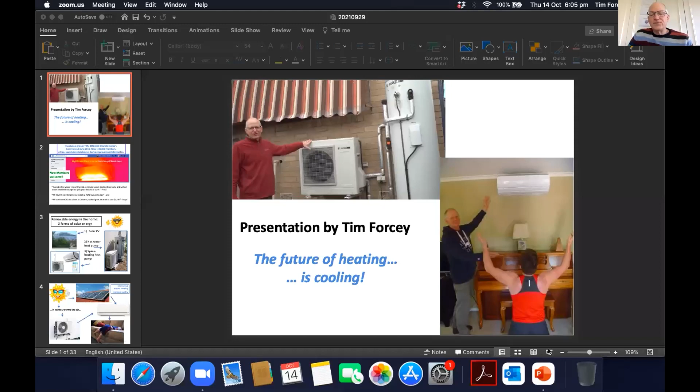The future of heating is cooling.

This is actually my second presentation today. Earlier on, I was presenting to an inquiry. On the western part of Melbourne, the gas industry is going to be installing another pipeline because they want to make sure that they can get peak winter gas to Melbourne on a cold winter day. And they think that they might have trouble doing that. So of course, they just want to keep expanding gas supply infrastructure.

My presentation there today was about how we could address that situation differently by reducing gas demand. That would make a lot more sense, because what I'll be showing you here tonight is how people can save a lot of money by not burning as much gas.

I'll be talking about the use of heat pumps, basically reverse cycle air conditioners, for heating your lounge room or for heating your water. Heat pumps suck free heat out of the air, and that's why it's so cost effective to use them for heating your living spaces and water, because free heat, well, no one's going to send you a bill for free heat. So that's why they're so cost effective.

A lot of the stuff that we'll be talking about here tonight is the stuff that we talk about every single hour of every single day over at the Facebook group My Efficient Electric Home, which is now at 35,000 members. That's the figure we had recently.

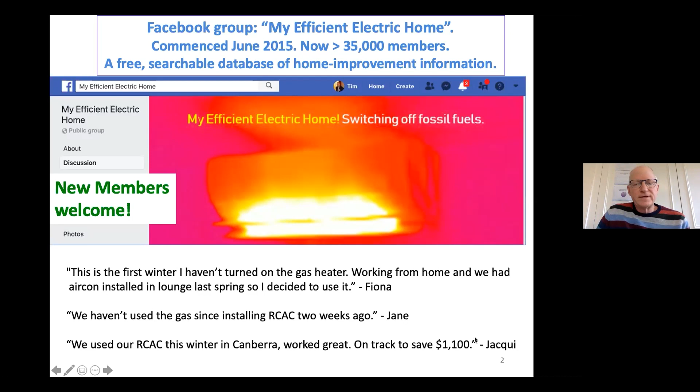So reverse cycle air conditioners are fantastic. Sure, you can use them for cooling, but you can also use them for heating in winter. And the point I made before is that using these heat pump devices, it's another way to harvest renewable energy.

So perhaps you don't have a good roof, or maybe you don't have a roof at all, and you're thinking, gee, I can't use renewable energy, I don't have a roof. Well, you don't even need a roof to use a heat pump. They're able to suck heat out of the air regardless of where you install them, outside, on a roof or on the wall, doesn't matter. So it's getting that message across that this is actually another form of tapping into renewable energy.

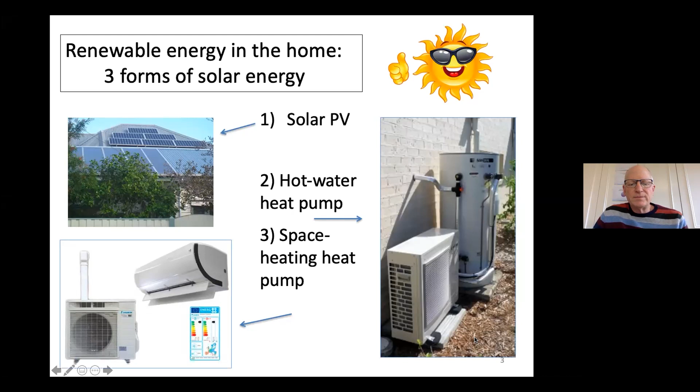And for some homes, it's the biggest way that some homes use renewable energy. With these heat pumps, you do need some electricity to drive the compressor, but if you're able to do that during sunlight hours, or even after sunlight hours if you've got a battery, running these devices with your own electricity generated on your rooftop with solar panels is an excellent combination. This way you can provide the cheapest heat and the cheapest hot water.

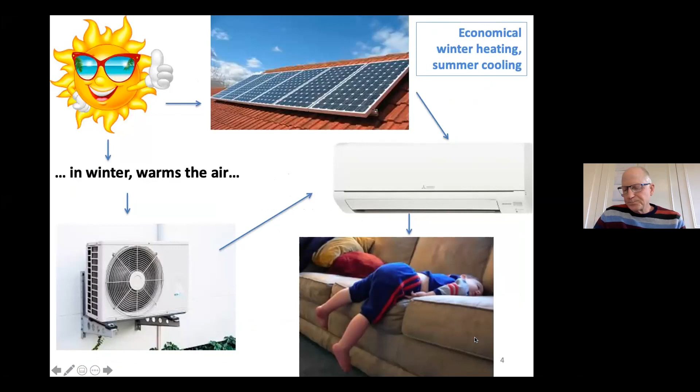Some of the work I did on this dates back a few years to research we published out of the University of Melbourne. We found just how much money people could save by heating with their reverse cycle air conditioners. Every year there are more reverse cycle air conditioners in homes across Australia, but people tend to only use them for cooling. They need to understand there is a heat button there.

So find that heat button. We're almost out of the heating season now, but we do have a big storm coming from the south. So if you've never used your reverse cycle air conditioner for heating, as this big storm comes up, go find that remote control. It might take you a few days to find it, since last summer. Find the heat button and use your air con for heating, because this can be the cheapest way to heat, far cheaper than heating with gas.

In fact, all the gas we're burning in homes these days across Australia is essentially economically wasted, because starting from a few years ago, with these heat pumps, we now have cheaper options than burning gas, and gas keeps getting more expensive all the time. So really any gas being burned in homes is an economic waste. We should stop doing that.

Sure, there can be a transition. Maybe you don't have a reverse cycle air conditioner yet, or maybe your hot water service is practically brand new and you think you shouldn't be switching it over just yet to a heat pump. So there'll be a bit of a transition, but the faster we can get off gas, the faster we can start saving money and also reducing the use of that fossil fuel.

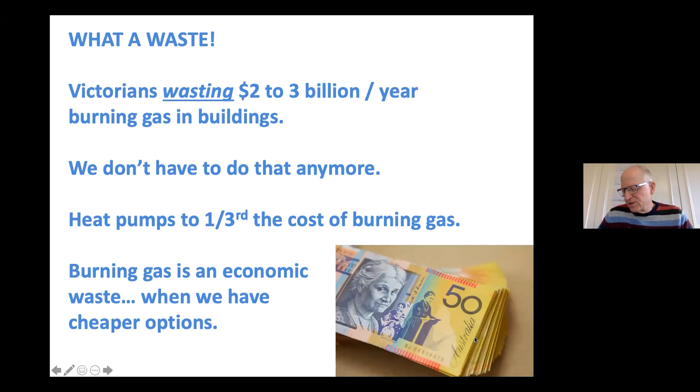We put one air conditioner at either end of the house, with the mind that we would use it for heating as well. And that's what we found we could do. So two split system reverse cycle air conditioners, one at either end of the house, is adequate to heat this house. We were able to get rid of the ducted gas heating, which was old anyway. I did some calculations and worked out that we are able to heat the house with the air cons at about a third the cost of gas heating.

This is tremendous. I mean, all the time we're talking about how the average Australian home has trouble with the budget. Well, here we can suddenly cut their gas heating bill to a third of what it used to be. So why isn't this great information, this news story, more widely publicized? So tell everybody about it. Heat with your air con, it's the cheapest way to go.

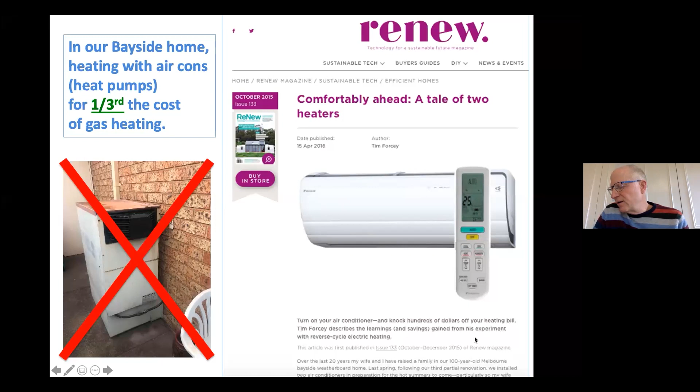But how do they really work? How do these heat pumps work? It is confusing for people, and it's one of the things that holds us back. But there's a refrigerant cycle in there, just like your refrigerator.

At one point in the cycle, in winter, the refrigerant gets to like -30 degrees and goes outside, where air is blown over the outside unit of your air con, and that warms up the refrigerant. So instead of being -30 degrees, the refrigerant's a bit warmer. The refrigerant goes through a compressor, which makes it really hot, and it comes inside to the inside unit, where another fan blows the heat off that refrigerant into your lounge room. Then the refrigerant goes back out and does it again. So in a sense, it's like a water pump.

You use a water pump to pump water uphill. These refrigerant devices are able to pump heat uphill from a place outside your house where it might be cold, but there's still heat in the air, and outside it's not -30 degrees. So there's plenty enough heat in that air to heat that cold refrigerant. Then the compressor pumps the heat uphill to 40 degrees or something inside with the inside unit, so when the air blows across the heat exchanger inside, it's enough to warm up your house.

And as I said before, that free renewable heat, where'd it come from? Really, it came from the sun. It's the sun that heats our air.

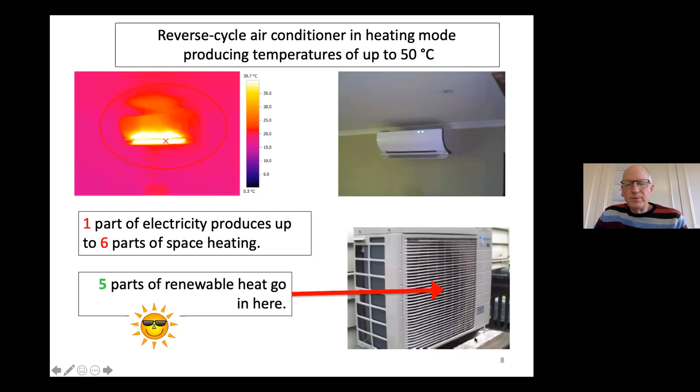Some people call this electric heating. I call them heat pumps, because here's another form of electric heating, which are these cheaper electric heaters that are basically like a toaster. What you do is put electricity through these, and 1 unit of electricity going in gives you 1 unit of heat coming out. That sounds pretty efficient - it's 100% efficient. But with heat pumps, they can be 500% efficient, because for every 1 unit of electricity you put in, you can get a great multiple of that amount of heat coming out. So you could say they're 500% efficient.

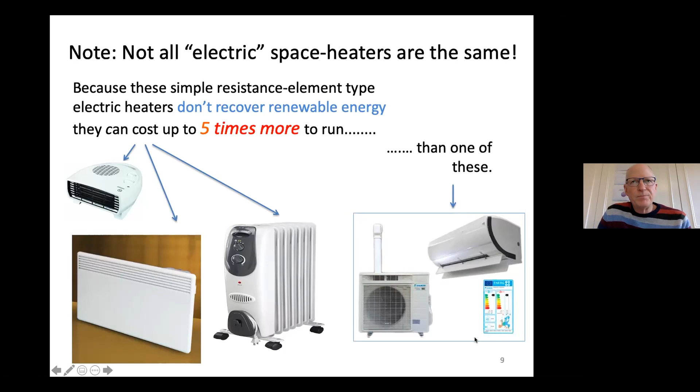Over time, Richard was able to get his house completely off of gas. And you see, one interesting thing is that the use of electricity doesn't even go up very much. So Richard would have been making other improvements across his house, probably improving insulation, reducing drafts with some draft proofing, maybe got a better refrigerator, a more efficient television. All those things add up.

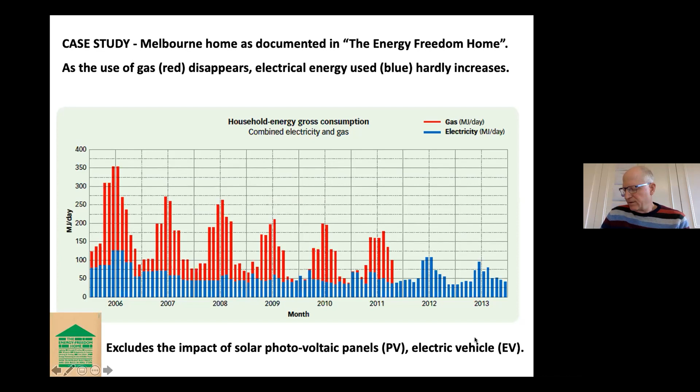So if you do all those things, you might find that you can get your house off gas, heat it, be comfortable, and your electricity use doesn't even go up that much. And this chart doesn't show the impact of Richard's solar PV system. So of course, if you can get solar PV happening on your roof, you might find you can make your net electricity use totally disappear, and your net energy bill totally disappear as well. So that's how you can get your houses off of gas.

And I described how you do that for heating, and you can also do that for your hot water. So here's a hot water heat pump - again, it's basically a reverse cycle air conditioner. It's not going to do anything for your lounge room, all it's doing is heating up the water in the tank that you see there. And again, it uses that leveraging effect where you put 1 unit of electricity into the thing, and you can get 4.5 parts of hot water coming out of it, with those suddenly magical extra 3.5 parts of heat. Where did they come from? They came out of the thin air outside your house.

And with these hot water heat pumps, you can even get renewable energy certificates, maybe as much as $1,000 off if you buy a hot water heat pump, because the Australian government recognizes this as renewable energy, and so you get some credit for that. And more recently, even for air conditioners for heating your house, the Victorian government's started to offer $1,000 rebates in some cases for people buying air conditioners that replace, say, an old dodgy gas heater or a less efficient electric heater. So that's what's possible.

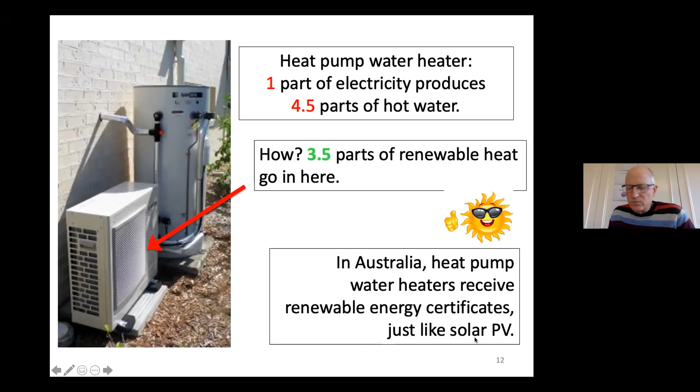That's what the members of the Facebook group are doing. I'm sure that's what a lot of the sustainable houses we'll see will not be using gas anymore. And so the word is getting around. Renew has obviously published information in this space, as has Choice Magazine. And as I said, the Victorian government's even coming on board, talking about planning for the electric home.

And this was a surprising one, AGL. You would have heard of AGL, they sell electricity, but they also sell a lot of gas. But if you dig deep into some of their web pages, you'll find they're saying that you shouldn't buy any gas, because you and the world would be better off if you didn't. So here we have even a major retailer, AGL, saying get your home off gas.

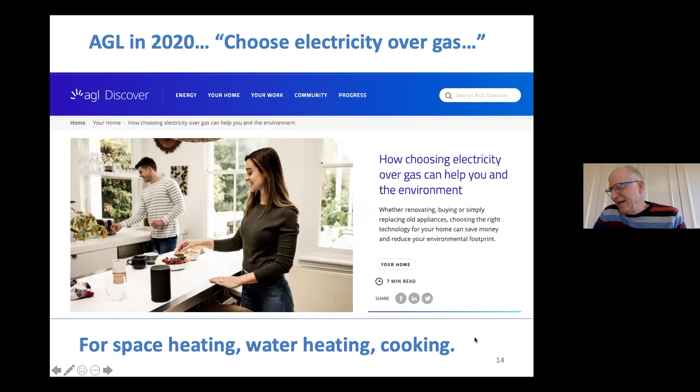And so people are doing it. We're collecting a gallery of these images of where the gas meter used to be.

At our house, we finally got around to doing the kitchen renovation. And so that was the end of the gas cooktop, and the induction cooktop went in, and we just had our gas meter taken away recently. I rang up Power Shop, said let's abolish this thing, and they organized for it to disappear. It cost me $69.13. So that can be the cost for having a gas meter taken away, because your garden will look much nicer if you plant a shrubbery there where you used to have the gas meter.

So that talks a bit about efficient heating, low cost heating. I didn't mention, in our old weatherboard house here with those two air cons, our whole heating and cooling bill is less than $200 a year.

I go into houses as a home energy advisor, and people are spending $10, $15, $20, $30 a day on gas for heating. So homes like that, in 10 days, they're spending more for heating than what our house would use all year. And it's just an old weatherboard.

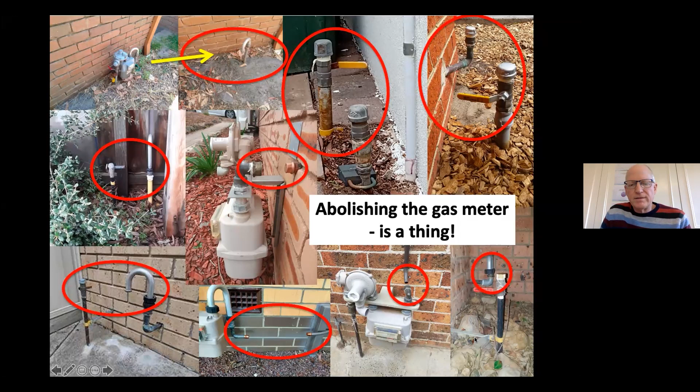Sure, some bits of it have been improved, but it really is key having those efficient air conditioners for heating and cooling. But it is really important to talk about the thermal envelope of the home, because there's no point putting heat of any source into a home, whether that's from gas or from a reverse cycle, just to see it immediately leak away. So our homes are leaky buckets.

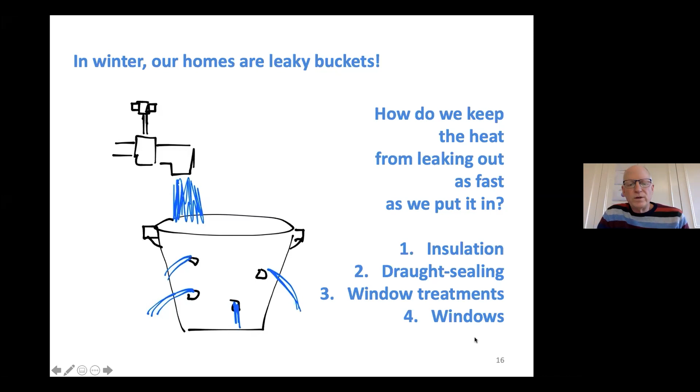Credit Richard Keech for using this analogy. We put heat in and it's immediately starting to leak out. In efficient homes, it won't leak out quite as quickly, but in leaky homes, it disappears very fast. So what are the different methods for trying to keep that heat in our homes in the wintertime?

Insulation is important, and we've had programs for having insulation installed in roof spaces. So we find a lot of homes with insulation in the roof spaces, but quite often it's been disrupted or it was never installed properly in the first place.

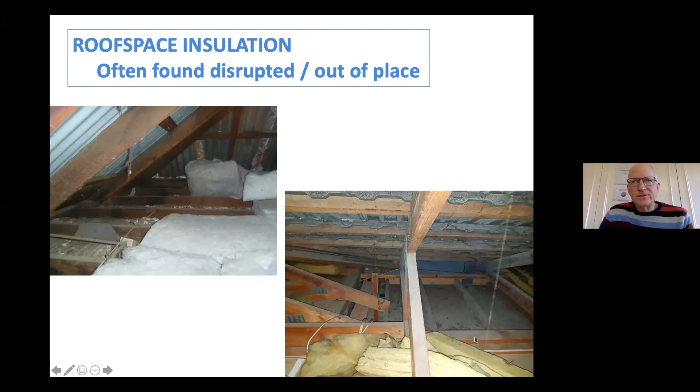So if anyone's been in your roof space in the last few years to run the NBN wire, or to change out those halogen lights, or to fix a fan, or do practically anything up there, they will have moved the insulation around and they probably didn't put it back. So I really recommend to folks, if it's safe to do so, have a look in your roof space, see what's up there, or get someone to have a look. But be careful of electrical hazards when you're going into spaces like the roof space.

And I say to folks who may have just bought an older home, they're like, should we bother to get these things? And I'm like, well, if you bought a new home, even if it had only been built to the bare minimum legal standard, six stars, it would have insulation in the walls and in the floor. So why should you not have that in the home that you just bought? Why shouldn't you be comfortable as well and have lower energy bills? Yes, you'll be up for some thousands of dollars to fully insulate under your floor or the walls, but that's what you'd have if you had a modern home.

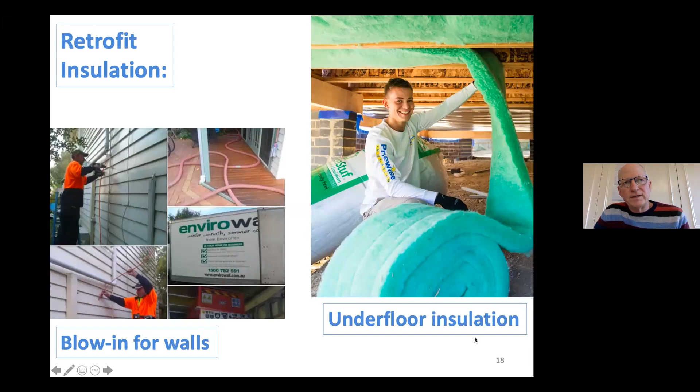And so any sort of improvements of your thermal envelope like this certainly make it easier for any heating system to keep you comfortable. And then draught proofing is another key one.

This is usually the number one priority for all the homes I visit, because we've made a habit of just chopping holes through plaster for a dozen different reasons, whether it's those old wall vents or the halogen downlights or fans, and just vents all through the house. Those things can be closed up and moisture can be managed in other ways. It's a bit of a big topic on its own, but we do lose just so much heat from leaky homes.

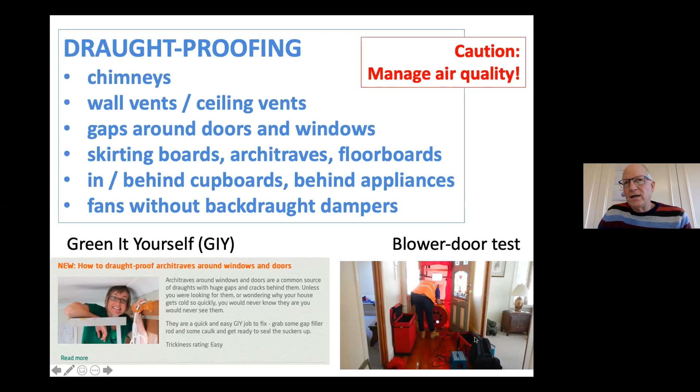But yes, while you're eliminating uncontrolled air leakage, we do also need to think about ventilation and what's happening with moisture. Maybe we'll talk about some of this in the Q&A, but it's also important to understand what's happening with moisture in your home. And by all means, use windows to provide ventilation when the weather is appropriate.

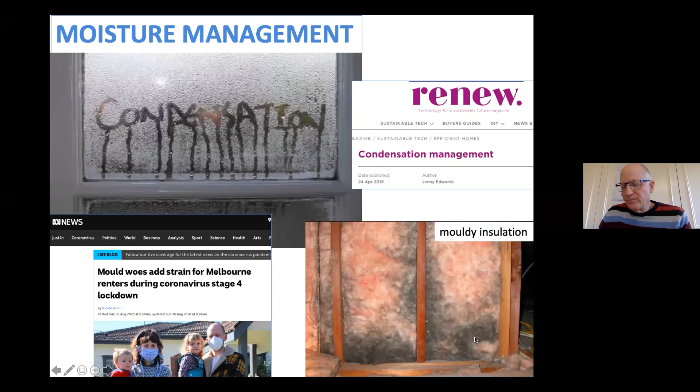Other bits around the thermal envelope of the home: interior window coverings, so heavy thermal drapes with pelmets, honeycomb blinds, cellular blinds, or even some of the cheaper things like, should you be in a rental or perhaps kids' rooms, you can even use something as simple as bubble wrap to basically give you double glazed windows, because our Australian climate zones aren't that severe, and practically anything we do to the windows is nearly enough and can give you a big improvement in comfort and reduce the energy bills.

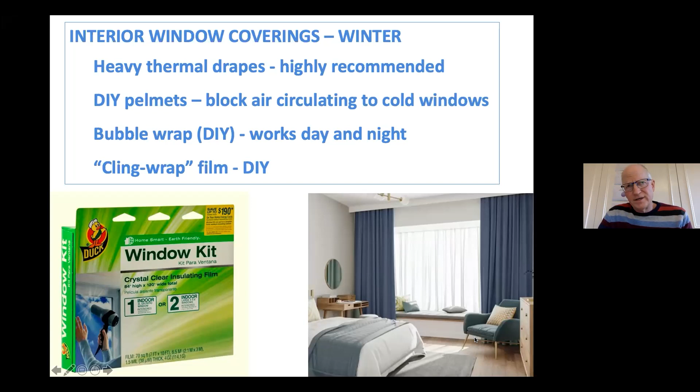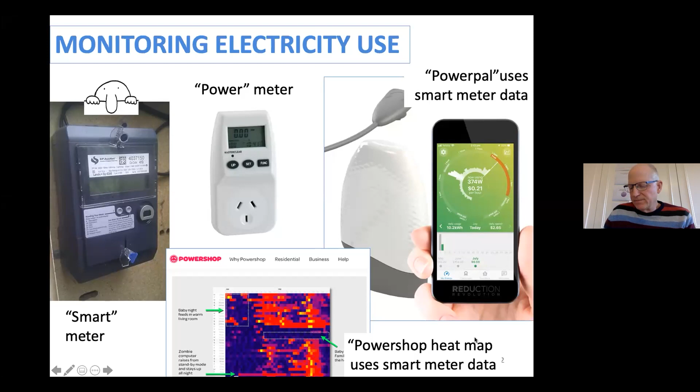I was in a client's home recently where they had the option of either heating with their reverse cycle air conditioner or some electric panels they'd mounted on the wall. Using this device called the PowerPal, which gives you instantaneous feedback on your electricity use, we were able to turn things on, shut things off, and they could very quickly see the difference that the different equipment has on their electricity use. And one last thing is just look after your equipment.

So anything that blows air around, whether it's the ducted gas heating or a reverse cycle air conditioner, should have an air filter, not only to keep the air you breathe a bit cleaner, but also to protect the equipment. So you should have a filter. If you don't, someone has taken it out and thrown it away. So you need to get a filter, and then you need to check it regularly.

All too often I go into clients' homes and they say, 'I'd like to heat with the air conditioner, but it doesn't work, so I guess I have to get a new air conditioner.' And then we find they're just not aware there's filters, and the filter hasn't been cleaned in 10 years. So that's something to understand: read the owner's manuals with any equipment and do the appropriate maintenance actions.

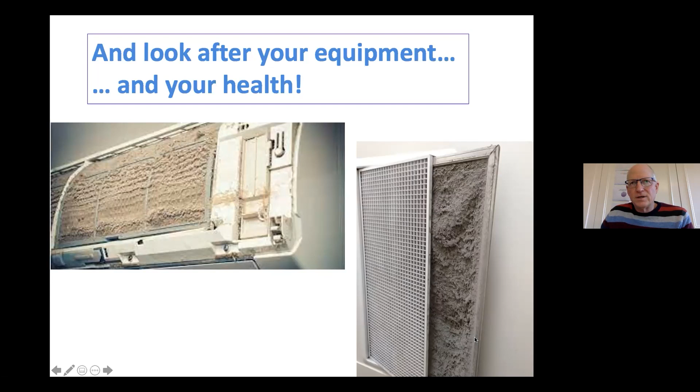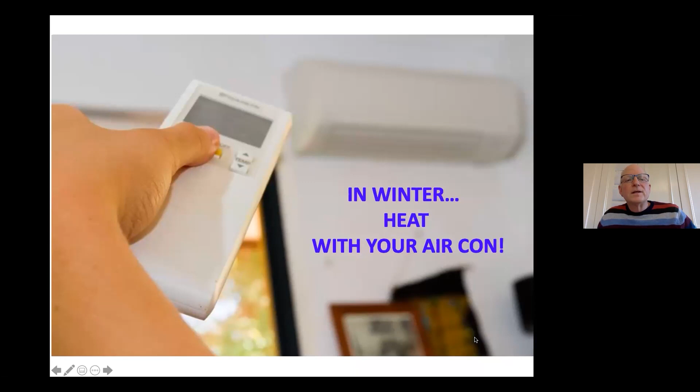So that's it for me for now. I'm happy to do a lot of Q&A later, but winter's almost over. I guess winter is officially over, we may still have some cold days. Try heating with your aircon, and certainly by next winter, if you could get in a position to do more of that, you'll save some money. So thank you very much.

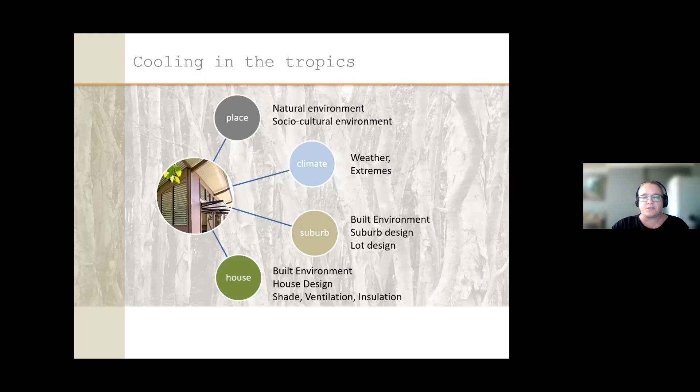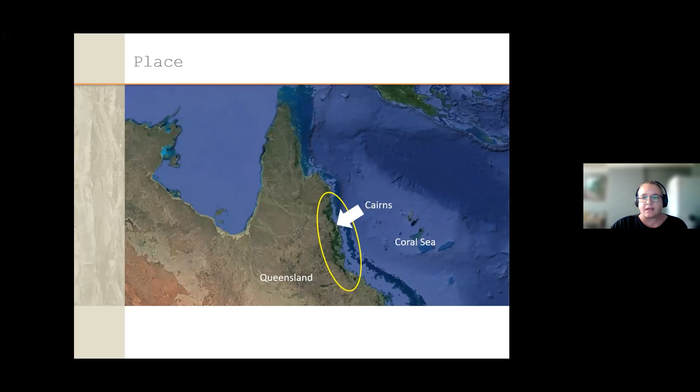Cairns is in the wet tropics of far north Queensland. When you see this area in satellite image, you can see that we occupy a pretty thin, lush, fertile strip of coast, bordered on one side by the rainforested peaks of the Great Dividing Range, and on the other side by the Coral Sea and the Great Barrier Reef. If we travel 30 minutes by car to the west, the rainfall reduces and the landscape becomes quite arid very quickly.

This is home, Cairns, or Gimoy in Yidin, the language of the Gimoy, Wallabara, Yidinji, the traditional owners of the Cairns area. Cairns has a population of 160,000 people, and people who live here value the lush, verdant environment, the relaxed outdoor lifestyle, and many opportunities for connection to nature. In fact, connection to nature and outdoor lifestyle are consistent priorities we find for our clients when we work with them on their house designs.

Our natural environment informs our preferences for recreation and socialising. Outdoor dining, markets, swimming and bushwalks are favourites among locals and visitors. With such a beautiful local environment, people prefer to live with their houses open as much as possible, connecting to outdoors and letting breezes through.

Cairns is also a multicultural place with a very rich history. In fact, we're a place with two histories, which is something many people don't consider, although it's pleasing to see this starting to change. The settlement history of Cairns is only 145 years old. We were settled or colonised in the 1870s, a much shorter timeframe than many other places in the country. So the First Nations history of this place extends for millennia, and the traditional custodians here maintain continuous connection to country and culture, which is really lovely.

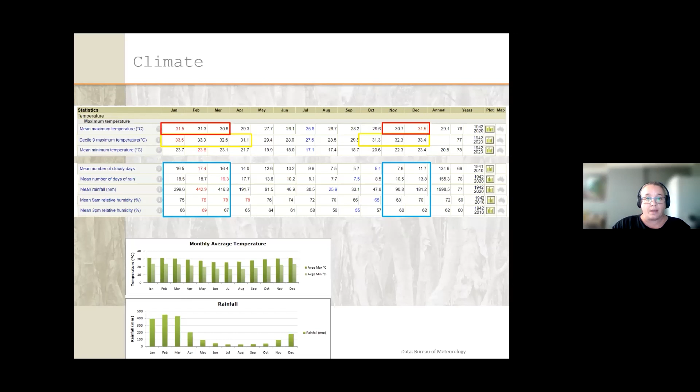In summer, our weather is characterised by temperatures between 23 to 32 degrees with approximately 3 hot days per month, temperatures greater than 33 degrees. These are the days many of us are thankful for having air conditioning on hand if we need it. But 3 days per month equates to only about 10% of the time during summer. Winter in Cairns is absolutely gorgeous, you could not ask for better. You could just about move outside and live under a tree.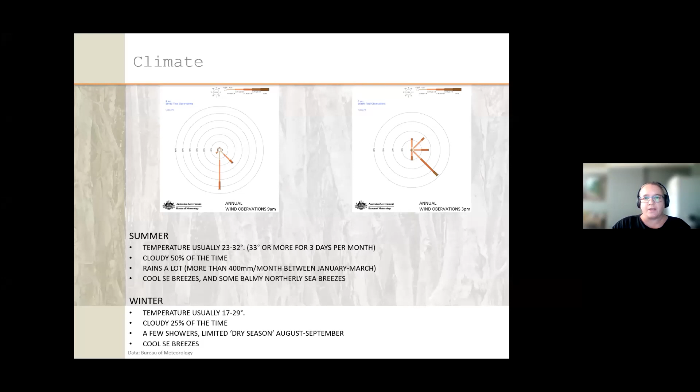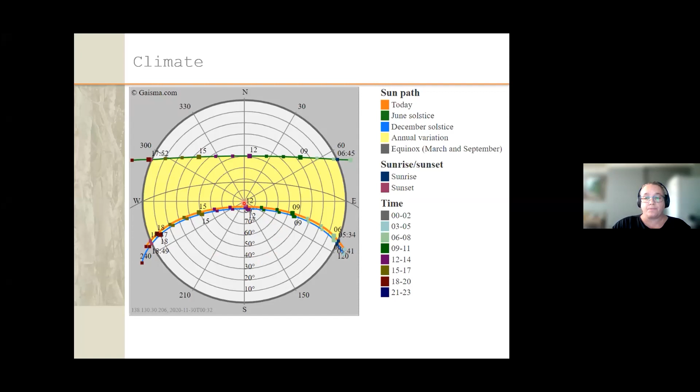In the tropics it's really important to understand this because we're north of the Tropic of Capricorn, as illustrated here—that's the centre of the circle, straight up. The sun path actually tracks to the south for us, which means we need to protect the southern walls and windows of our houses from direct summer sun. So if you live south of Rockhampton, you don't have to deal with that.

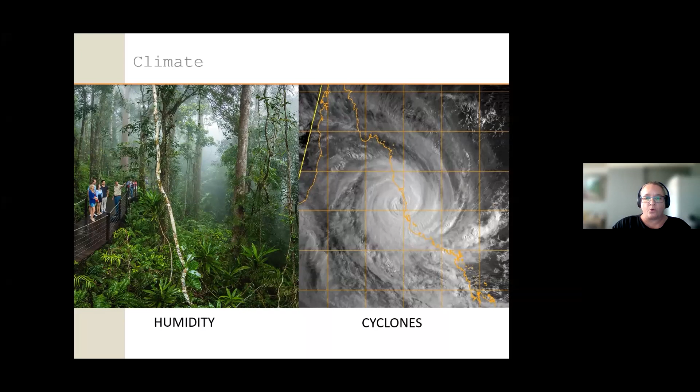Climate challenges: high rainfall causes humidity. We're also at risk from tropical cyclones in summer and autumn, generally from around Christmas time through to May—sometimes we've had cyclones in the past. So we need to design our houses to ensure they're safe and watertight in very high winds as well. High humidity and temperature means we need to manage condensation, particularly around air-conditioned spaces. It's interesting to hear Tim talking about that in cooler climates too. We need to select materials carefully to last in the high humidity and high rainfall.

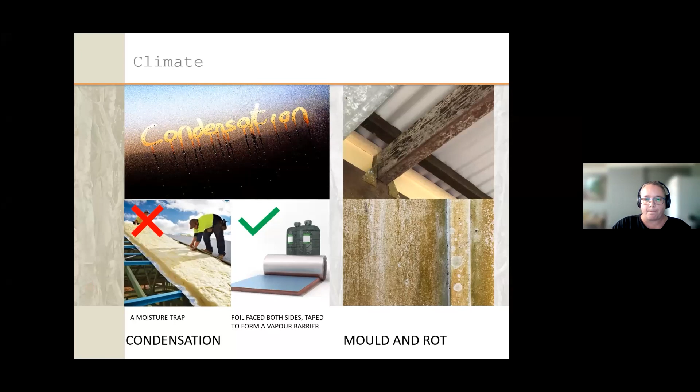We also design ventilation cavities for materials so they can breathe. Many manufacturers have installation instructions for cladding that call for gaps to manage condensation. Typically wall cladding would have a spacer, then a sarking layer, then the framing behind that, and that allows condensation that forms inside the cladding to get out—it's not going to rot the structure. Right, still at large scale, let's start talking about suburbs and suburb design.

The drivers for this include land availability and housing affordability. And while there are a few good examples of new suburb development in some of the larger cities, these new suburbs are seldom done very well in regional Australia, sadly. And in Cairns, we're losing our green spaces rapidly. I think we've got a particular set of environmental circumstances up here that means we require an urgent conversation about the way we develop new suburbs.

If you go to the ABS and look at the statistics for the last 15 years, the site area for houses nationally in Australia has decreased by 22%, down from 602 square metres in 2005 to 460 square metres in 2020 - that's the average Australia-wide. Yet in that same time period, there's been an increase in floor area of houses. The average floor area of houses in 2020 in Australia was 248 square metres. By comparison, the average floor area of detached houses in the United States in the same year was 210 square metres. That's a massive difference.

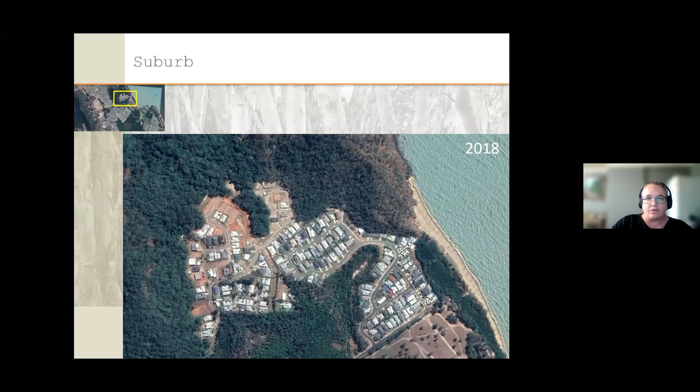So as far as suburb design goes, I see a real need for change, and I think it's particularly urgent in a place like Cairns, given our relatively small amount of developable land between the mountains and the sea, and the fact that we've got such a rich environment, and our environmental and social values up here are so important.

So that was my soapbox moment on suburb design. But for me, it's really important because it feeds so closely into sustainable house design and what's possible from our perspective as designers when we are presented with a lot to design for.

And so to wrap that topic up, I'd like to recommend a book for people. It's been out since 2010. It's on the topic of backyards and suburb design, and its content to me is actually even more relevant now because lot sizes have continued to decrease since this book was written and house sizes have increased. For me, this book clearly outlines why we need green space in our suburbs.

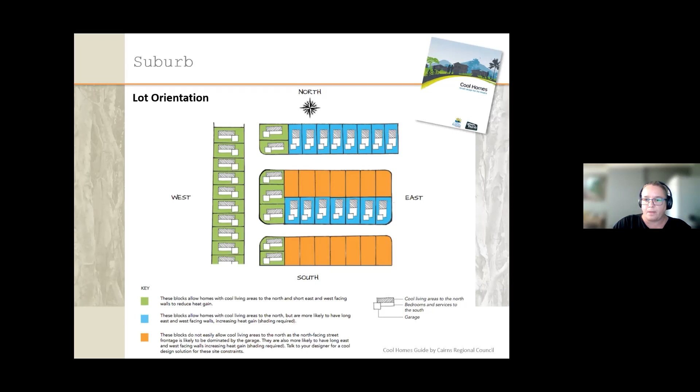So let's change down in scale finally, and I'm probably going to start talking about the thing you thought I was going to talk about this whole time, which is house design, how to keep houses cool here in the tropics, and how to reduce people's reliance on air conditioning.

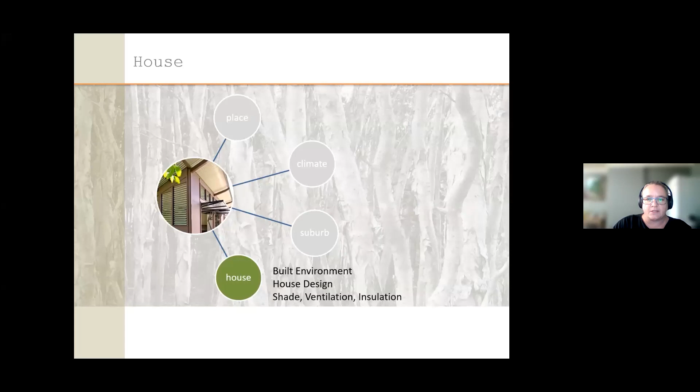Typical houses built in Cairns, those dense suburbs I showed you before, so post-1980s, are generally not particularly well designed for this climate, project homes. These project homes could be anywhere in Australia. They generally have poor natural ventilation, little shade, and are reliant on air conditioning for much of the year to keep temperatures comfortable.

As architects, we prefer to design free-running homes that allow people to connect with outdoor spaces and live comfortably without air conditioning for most of the year. The houses we design incorporate deep shade, great cross ventilation, and a well-insulated building fabric. While many of our houses will still have some air conditioning available for those few extreme temperature days, those 3 days a month I spoke about, the houses are not reliant on it.

Additionally, we have a core philosophy, which we call the least house necessary, where we challenge people's belief about how much enclosed space they need to live comfortably. This is going back to that average floor area of houses in Australia of 248 square metres in 2020, as a reminder.

So apart from floor area, I'm going to come back to that. I'm going to present a few case studies at the end of this, but I'll move on to some of the other aspects of how to design to keep your house cool.

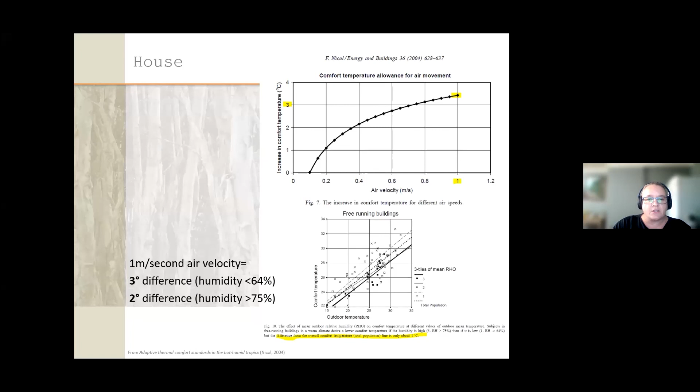If we can maintain 1 metre per second of air velocity, it makes the temperature feel 3 degrees lower. On days where humidity is high, say above 75%, it makes the temperature feel 2 degrees lower if you've got that 1 metre per second of air velocity. This makes a huge difference, and it helps reduce the need for air conditioning.

To recap and summarise some of the key ways to design a free-running house here in the tropics: orientation, having a narrow floor plan, which I'll show in a case study shortly, and having large openings to maximise cross ventilation. Louvers are great - they have 100% openable area. Up here in the summer monsoon wet season, louvers are controllable - you can keep them open and they keep rain out. Whereas with sliding glass windows, even the remotest bit of wind brings rain in and you've got to shut them. So louvers are great value.

We like to incorporate high level windows where we can in spaces, so you get thermal venting. You can see that here - this house cross section is 2-storey with a void, so air heats up and is drawn out at high level.

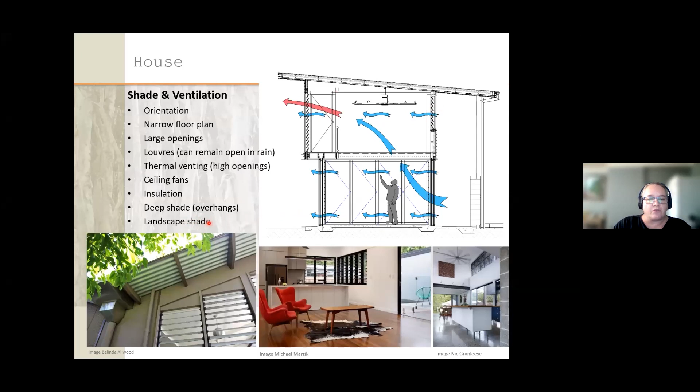Ceiling fans, insulation in roof and wall spaces, and also having deep shade, so generous eaves and deck areas, or in this particular house, a shaded outdoor terrace area. But the other thing, and I often come back to this because I'm a landscape architect too, is don't underestimate the value of shade from landscape. Planting trees can reduce the temperature in your house by a couple of degrees - it's quite noticeable.

Back on the topic of insulation, we need to consider the type and its R-value, how effective it is and where we use it. In air-conditioned spaces in this climate, it's really good practice to put insulation in ceilings as well as under the roof sheet, because we don't need our air conditioners to cool our roof spaces.

Using light colours on the roof and walls of your home helps to reflect heat. High R-value insulation and light coloured roof and walls make a huge difference to the temperature of your home, and ventilating the roof space can also help let out hot air.

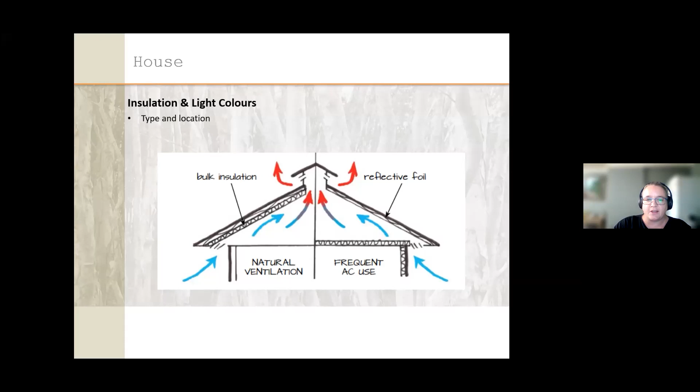Here's a first case study, a new house built a few years ago, showing how we've incorporated key design principles. Our Gavin Street house was built on a steep site with really poor climate orientation. The long axis faced north-south, completely the wrong way from the diagram I showed earlier. But this steep site on a hill had absolutely gorgeous expansive views and captured great breezes.

We came up with a very narrow floor plan, which I mentioned a couple of slides ago. Having a narrow floor plan helps to capture breezes and bring them through, whereas a deep floor plan blocks breezes when you've got stacks of rooms.

Verandas, front and back, provide deep shade, and for this house that was particularly important because the long sides face east and west, so we really wanted to stretch out those eaves and put verandas on those sides to help protect the house from the sun.

All areas of this house enjoy 180-degree views through the treetops to the Coral Sea. The inside and outside areas connect pretty seamlessly with a large covered breezeway that separates the living and bedroom pavilions of the house.

One thing we're most pleased about is this house has a gross floor area of 215 metres squared, but only 98 metres squared of that is fully enclosed. It's a 3-bedroom, 2-bathroom house, yet it feels generous, with high ceilings and a great connection to outdoors. Because it had a small footprint, it was also very affordable to build.

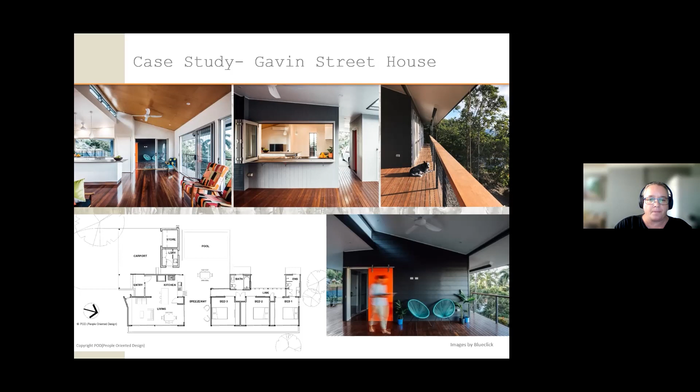Now I've got a couple of case studies of renovations or retrofits that we've done in recent years in Cairns.

These two houses - this one, Edge Hill House, is 1960s vintage. It started its life as a government house, brick veneer, red brick veneer. The owners came to us because they loved the original red brick, which is not common in Cairns. In fact, we don't use brick anymore because it's very hard to tie down for cyclonic winds.

One of the nice things about this house was that it was an old block in an inner suburb, with a huge yard and established trees, which the owners loved. But the house was designed really poorly for climate.

This slide shows how it looked before we renovated. It was quite pokey feeling and very hot and uncomfortable to live in. It was poorly oriented, and many of the habitable rooms got too much hot afternoon sun. The house didn't capture breezes from the south, from the backyard. It had no outdoor covered shaded areas and just didn't connect with the backyard at all - completely disconnected, a real wasted opportunity.

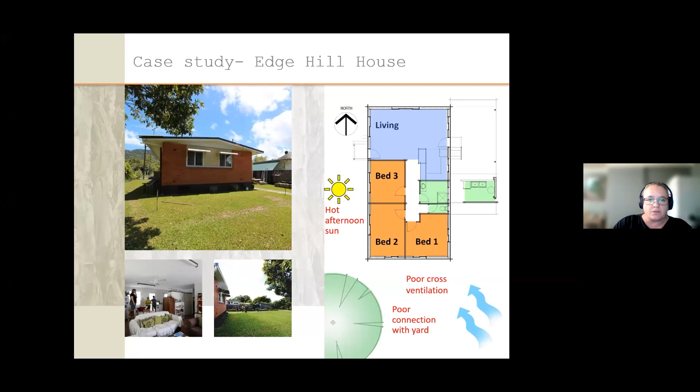In the renovation, some of the things we did was look to open up the house a lot more to get breezes through. As we removed material, we saved some bricks and recycled them and other materials. We increased natural ventilation - here is a high level vent into the bathroom with timber slats and also breeze blocks. We put in roof insulation, and with this big opening, we connected to the outdoor backyard.

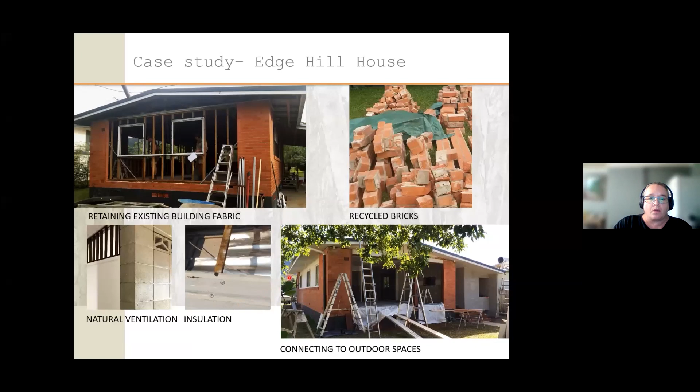And the finished result of that, there it is there. The other thing we did, which you can see in the floor plan here, is reconfiguring the spaces - we tipped the bedrooms out to the north.

We opened up the living area via an expansive back deck out to the backyard. We also took the wet areas out and put them off to the side of the house, going back to an old-fashioned notion of having wet areas off a breezeway, almost as an outhouse - but it actually works very well in this climate because we don't get too cold. So laundry, bathroom and toilet are off this securable breezeway, which also draws breezes through and into the house.

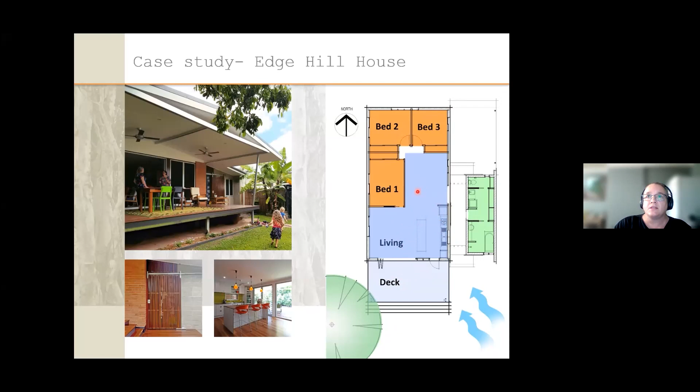This is my last case study, another renovation. This Whitfield House was also 1960s vintage, red brick veneer construction. It had an almost flat roof with a ceiling lined directly under the roof battens. The house faced due west and there was no roof or wall insulation.

Living areas were cut off from the backyard with this enclosed shed area, and breezes were completely blocked off. The house was pokey and a hot box. When I first visited, the woman living there had a toddler, and they found the most comfortable place in the whole house to sit was by the rear garage door, where they could get a cool breeze. The rest of the house was just about uninhabitable in the summer months.

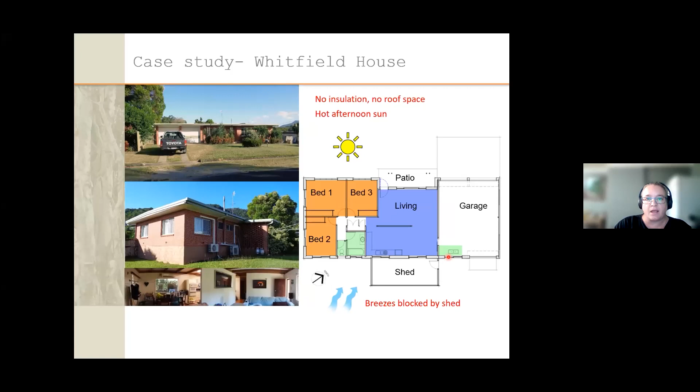So we did a similar thing with this place, but we went a step further and pulled the old roof off and put a new roof on, fully insulated. We used scissor trusses so we could get high ceilings inside to help make the spaces feel more generous.

We also aimed to minimise the new area that we built on, instead focusing on making the existing spaces work more efficiently. We converted the old garage into a master suite, and built a new garage on the front of the house. We reconfigured the living and kitchen areas to make the house feel more open and large.

We designed a landscaped front private yard with shade trees, which will take some years to grow, but when they mature, they will help protect the house from that western setting sun.

So both these renovated houses began with houses that achieved the equivalent of 1 to 2 star energy rating, and on completion delivered more than 8-star energy ratings. Both houses were extensively renovated 5 to 6 years ago at a cost of around $200,000 for the Edge Hill house, and a bit more than that for the Whitfield house with its new roof as well.

For the owners of both of these houses, this investment was worth it. They have extended the life of 50-year-plus old houses, located on generous, large blocks of land in established suburbs close to the city. These houses are now comfortable, cool, low energy, sustainable houses with great connection to outdoor living spaces.

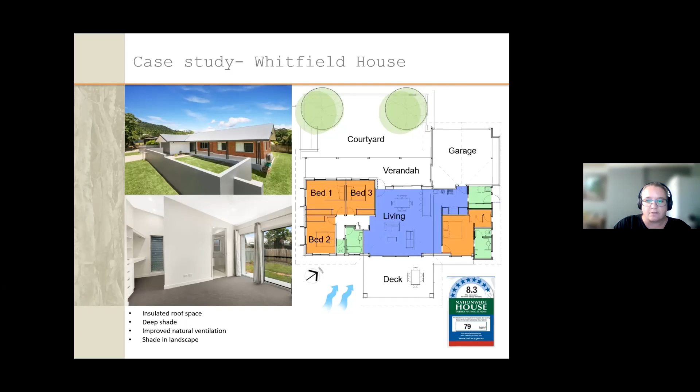The total investment for each of these houses is more than buying a new project home on a small lot in a new outer suburb, but the quality of life and comfort offered by these renovated properties is far greater, as is their value as an investment, because of their location, the size of their yards, and the quality of living they now offer.

And that concludes my presentation on cooling houses in the tropics. A bit of a wild journey around a lot of different topics, but we ended up about cooling houses in the tropics. I hope you enjoyed that. Thank you.